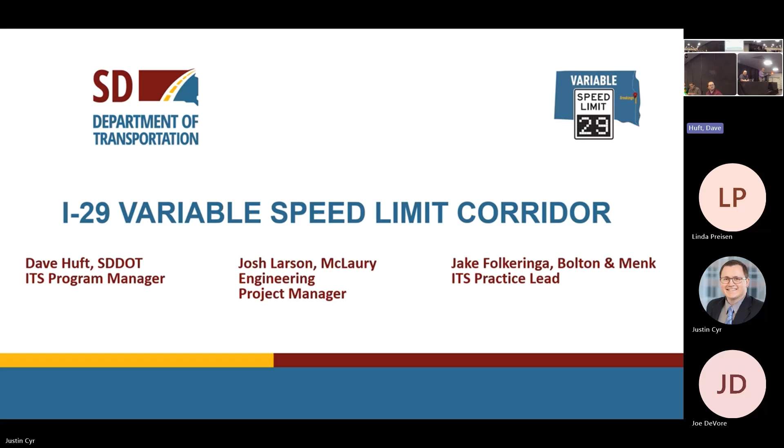Josh Larson with McLaury Engineering, and today we're going to run down the I-29 variable speed limit corridor. This is a project that was recently completed here in South Dakota, and it was in service for the first time this winter. Jake will come up and present, and Dave Huft will join me. But today we're just going to share a little bit, starting with what I joke about as the fun section of the presentation, the project background, and then Jake and Dave will give more details.

So this project, the project limits - this project is about 35 miles straight north of here. If you go over to I-29 and head north, I think mile marker 80 is Sioux Falls. We started at 114, which is the Flandreau exit. As you go north through the corridor, some landmarks: at 117 there's a large slough area adjacent to the interstate. Exit 121 is the Ward exit, where South Dakota DOT has a rest area. At 124 is the Big Sioux River crossing, and 127 is the Medary Creek crossing. Then as you get into Brookings, there are three interchanges at 130, 132, and 133.

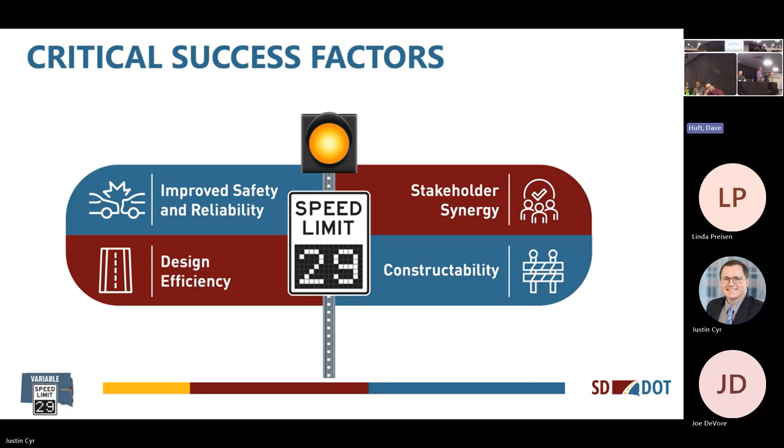When we kicked off this project, we identified four critical success factors. The first is we wanted to improve the safety and reliability for this corridor - we knew those two things were a big success factor. Secondly was stakeholder synergy; we wanted to hear from all the stakeholders on this corridor about what they dealt with, the problems and issues, and how they handled those problems along the corridor. Then we wanted to look at design efficiency, trying to make this a cost-effective approach but also a high-quality product for the user when it was all said and done. And then constructability - we wanted to make sure our plan set was easy to understand, not overly complicated, so we could get a lot of contractors to want to bid this project. So those were the four success factors we were looking at.

We created this dashboard here, so we utilized all the data that we had available to us, put it into the dashboard, and we were able to look a little closer at the data and start to see some trends and some different issues that popped up along the corridor.

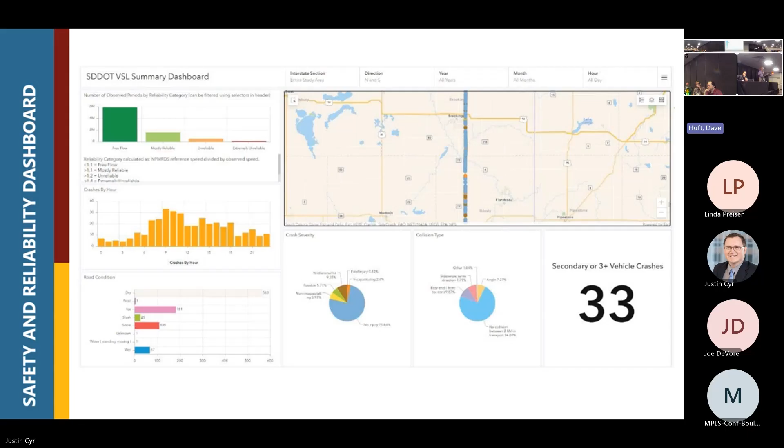As we put this into a heat map, we could see where all these accidents were occurring. Some of these locations on the map really stand out. The first one, on the far left, is 115, the Flandreau interchange.

What we heard about this location is that the weather just seems to change at this spot. To the south it'll be wet and the road conditions seem okay, but right at this location things seem to change all the time—it will get icy as you head north.

117 was another location that stood out—that was the slough area. And 124 was the Big Sioux River crossing.

The next larger heat spot was 126, 127—the Medary Creek crossing. At that location, the interstate sits down lower than the adjacent ground on both sides, so it gets different wind action through there and some drifting, which we saw as a problem area.

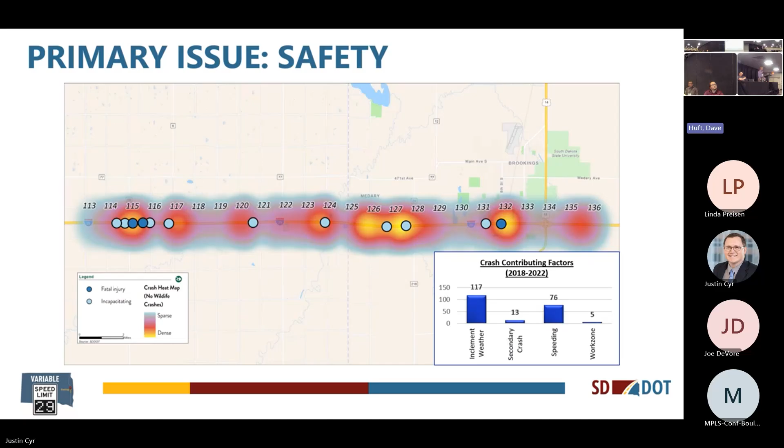Some other background on this corridor: in 2022, the far left graphic shows there were 3 full roadway closures for that section. The next graphic, with 9 football trophies, might make you think that represents how many national championships the Jackrabbits have—good guess, but not correct. That's actually 9 home football games they had in 2022, which created a lot of congestion and traffic along the corridor.

So that's some of the background data that we had, and I'm going to kick it over to Jake here to get a little further into the details.

All right, thank you, Josh.

I want to talk a little bit about the proposed system and what we came up with based on this background data. First off, we did an extensive stakeholder engagement process at the beginning, working with everyone from DOT staff, maintenance staff, ITS staff, and state patrol to really understand what the issues were along the corridor, which Josh just talked about in the previous slides.

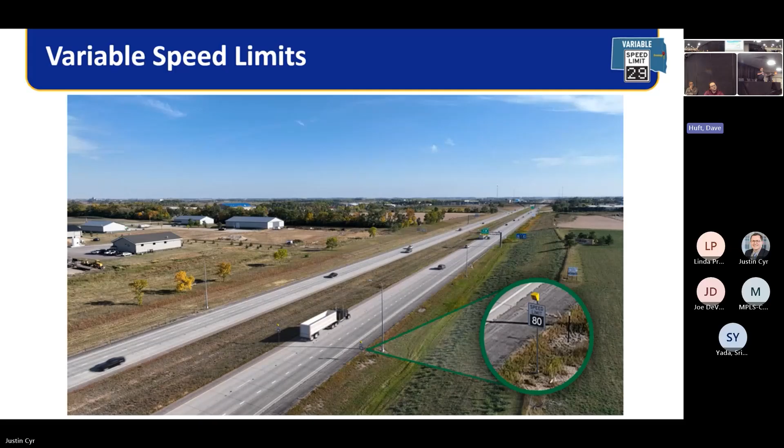We used this at public engagement meetings, things like that, just to give people an idea of what this might seem like. So as you can see here, this is just a typical day on the corridor. You can see it's sunny. This variable speed limit sign says 80 miles an hour. Everything is good.

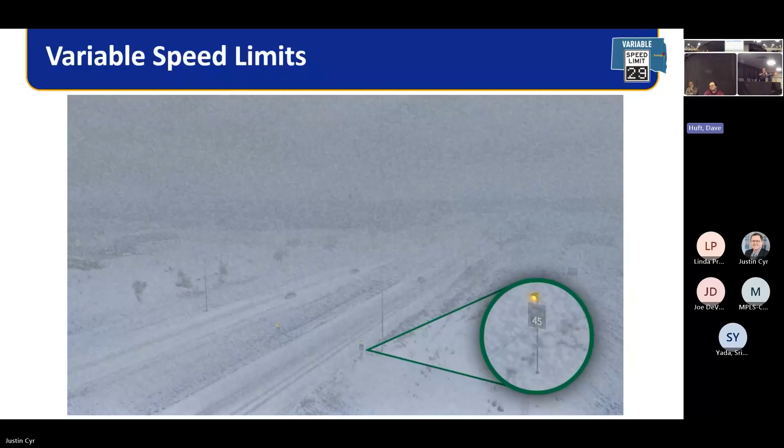Here we go. As the snowstorm starts to roll in, we see the snow detection - the cameras are detecting that snow. ITS staff might be meeting with region staff saying, hey, we need to lower the speed limit. It can get lowered to 60, you can lower it to 45. That's a decision they make, it's not automated based on the weather.

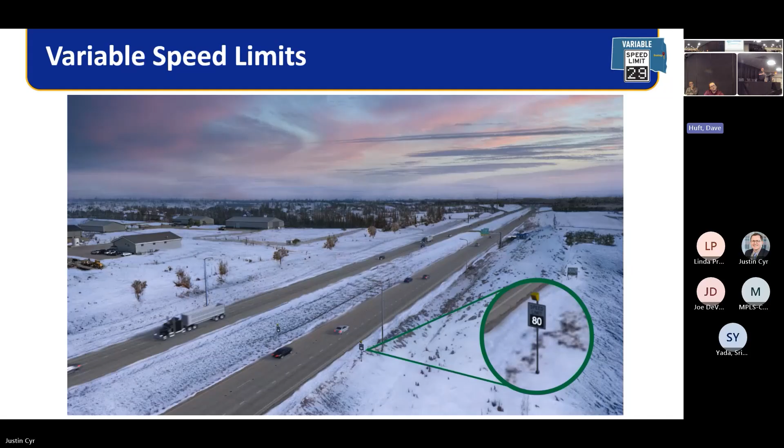Then as the weather improves, maybe the snow plows are out, things start to clear up, we can slowly raise that speed limit back up to 60 and ultimately the 80, back to those free flow conditions. That's just a quick synopsis of how it works, but I'm going to spend a little bit of time talking about the details of the different ITS devices and components that go into a system like this.

On the top are what we call the core VSL system components, the things that were really necessary to make this work. On the bottom are other ITS devices done with the project that are complementary services, I would say, for operations along the corridor.

Obviously, you have the variable speed limit signs - that's an example of one there, what you're using to convey to the motorist the current speed limit. The second picture is an environmental sensor station, so from that we're getting different road weather data - could be pavement friction, visibility, wind speeds, humidity, different factors we want to use to understand the conditions on the roadway.

Vehicle detection, that's all about traffic speeds - how fast are people going, are we seeing a lot of slowdowns due to weather or something else. Cameras providing us the eyes in the sky to see what's going on out there.

But we did consider some supporting ITS systems - dynamic message signs to give more detailed traveler information to the public about what's going on, if it's a weather event or maybe there's a backup for a Jackrabbit football game. Ramp queue detection was also used, mainly during those home football games where the exit ramps to the SDSU area are backing up so much that cars are on the main line. Obviously, if there's cars stopping or slowing down on mainline lanes of I-29, we're going to have problems. So that's something we looked at.

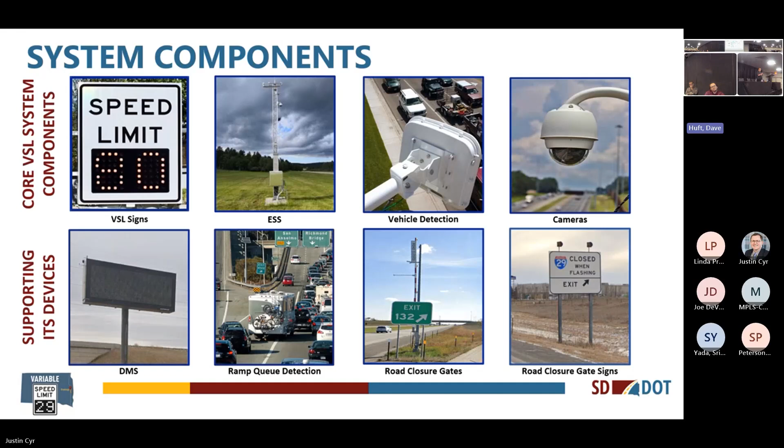Road closure gates, they use those throughout South Dakota to close the freeway as needed during inclement weather events. And also road closure gate signs - those are signs that might be on I-29 or one of the crossroads to make sure people know the roadway is closed ahead. So those are the different components. I'm going to spend a few minutes talking about each one of them, why they're included, how we place them, and that sort of thing.

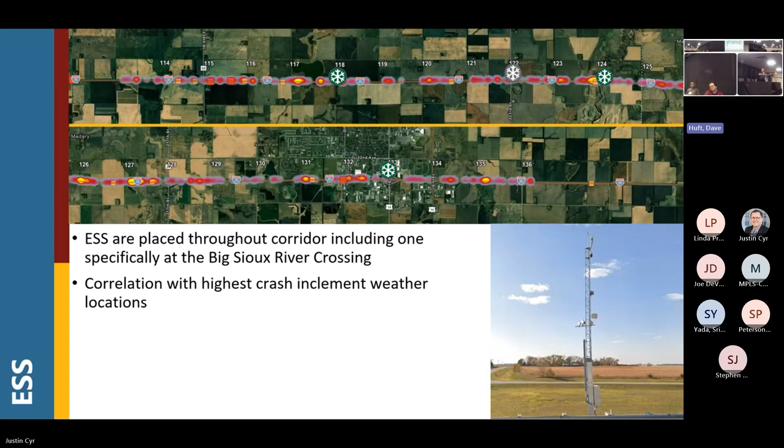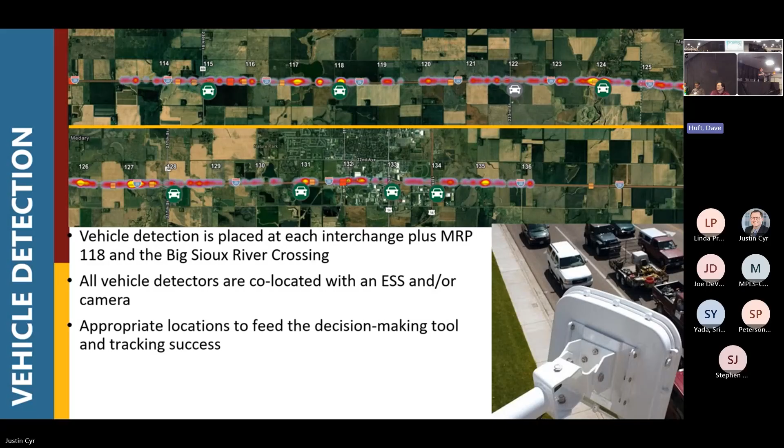Another thing I want to talk about with the vehicle detection is it's not just useful for detecting when vehicles are slowing down, but it was also a useful tool to help us evaluate how well the system worked. So we can look at, okay, what are speeds before the snow event, let's say? How are speeds changing during? And then how are we getting back to normal conditions? So the detection was a key part of that evaluation. I think Dave has some slides on that later on.

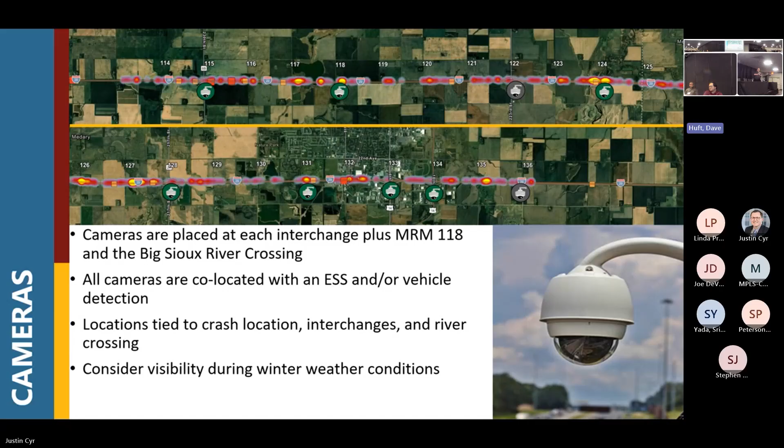Cameras, I think this is pretty obvious. You guys have all seen traffic cameras in different environments. Again, trying to co-locate these where we were already providing power or communications anyway, maybe at a place we see a lot of crashes, interchanges, river crossings. One thing I will note is these cameras can probably see at least half a mile, maybe a mile if the conditions are ideal. We realize when you're using the VSL system, the conditions aren't ideal - you might have whiteout conditions. So by no means is it end-to-end full camera coverage during any condition. But in general, on a nice day, we can see most of the corridor, with some extra ones in the Brookings area.

DMS, this is something that we went back and forth on a little bit as part of the project. There was an existing DMS on the north end. On the south end, we thought about adding one. Different perspectives on this - obviously a nice thing about a DMS is you can provide additional information to motorists as they enter the VSL corridor. A couple other states have told us they find better response to the VSL system if you can provide that supplemental information - it says icy road ahead or there's a crash. It seems like people slow down better if they know why they're slowing down rather than just seeing a sign with a different number on it.

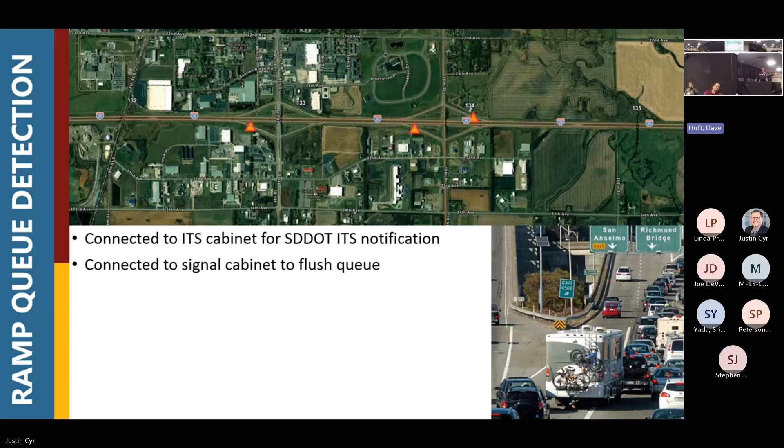We looked at some different options for how we wanted to do these. What we ended up doing - I know State Patrol will a lot of times just have someone go out there and help manage things - we did connect it to the nearest ITS cabinet. So Dave, when he gets his ATMS operational, we get a notification that the queue is built up, and he could use that to post a message on a DMS if he wanted. But it's also connected to the signal cabinet, so if we wanted to activate a particular phase to flush the queue, we could do that as well.

Road closure gates. This was another one that we had some different conversations about. Do we want road closure gates at all the interchanges or ramp closure gates? There's mainly the main line gates that obviously force you to exit. The ramp gates prevent you from getting on. So we worked with the region to figure out where those made sense. At locations where we didn't, the location is not shown here.

We did do some consideration of possibly automating the gates, and by that I mean the ability to remotely have the gate lower and raise. A lot of times with that you want to have a camera or something to make sure it's working properly. But I know there are region staff located close in the area, and that's something that did not end up being included in the project, but something South Dakota might consider for future projects.

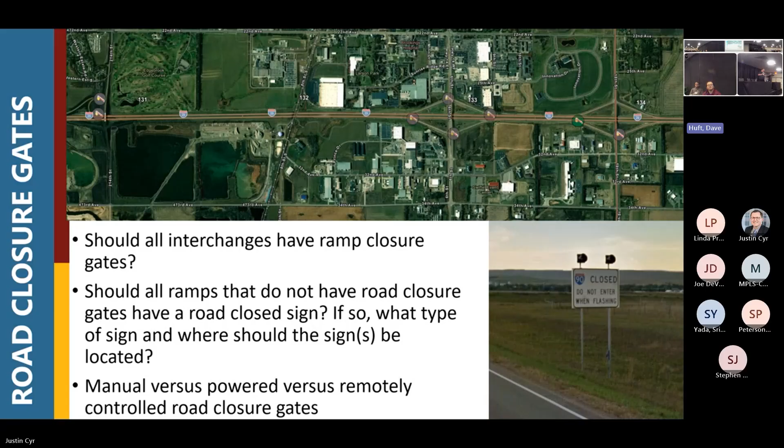We also try to provide power to the adjacent VSL signs from that location. We're trying to minimize the number of power services we have along the corridor. Like I said, it also enables us to provide backup power at one central location. We did decide upon battery backup for all the sites, and all the sites also have a generator hookup. So if we were to see a significant power outage that lasted days, if the region wanted to, they could bring generators out there to power some of the signs.

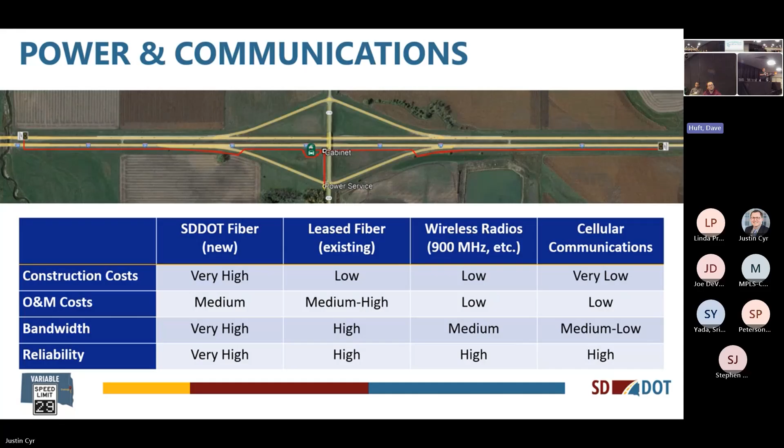From a communications perspective, we looked at different options. Obviously South Dakota DOT having their own fiber would be awesome, that'd be great, that'd be reliable, but it's very expensive. We looked at lease fiber - there's some other fiber in the area - wireless radios. We ended up going with cellular communications. That's what the DOT uses for their ITS communications for a lot of devices across the state, and it's plenty adequate for what we're doing here with posting messages to signs, getting camera images, things like that. And it's operated really quite well.

There was a previous design for an I-90 VSL in Sturgis that was done before this, and unfortunately that one, the bids came in high, and we wanted to make sure we incorporated some of those lessons learned from that previous project into ours. Some of these Josh talked about a little bit earlier - we wanted to make sure these plans were simple and clear, and we needed to get bidders. That one previously bid for Sturgis along I-90, they only received one bid. It was way over the engineer's estimate, and the project wasn't able to move forward. We didn't want that to happen here, so we tried to take some lessons learned and incorporate them.

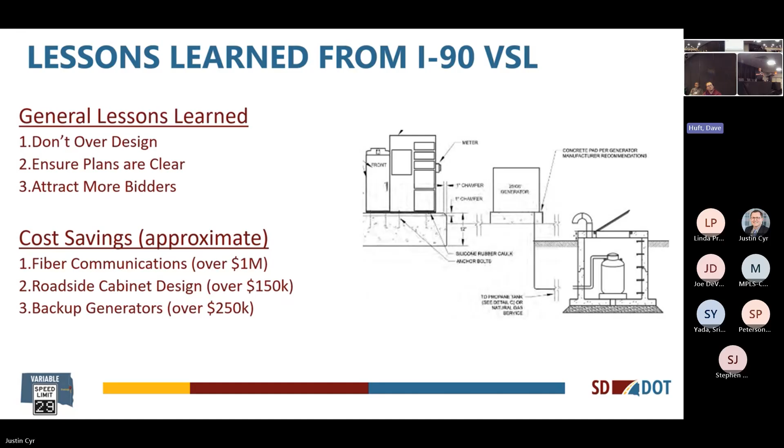Some other specific things we did - I know that corridor originally they wanted to do fiber the entire way. You can save a lot of money by not doing a fiber deployment. We kind of simplified the roadside cabinet design. That other project also had backup generators permanently installed at a lot of sites with underground propane tanks to power them. So we really worked with the stakeholders to talk about what do we really need. We want to make sure this project is successful and has a reasonable cost, and those are some of the decisions we made to optimize that design.

And with that, I'm going to hand it over to Dave to talk more about the construction and how the system operates.

I can't do two things at once. Before I get started, Brian, how much time do we have left? Still got 20, 25 minutes. Oh okay, I won't take nearly that much.

I wanted to take time to acknowledge some other people in the room who were really involved in this. Pat, I'll start with you. Pat Brueggemann works in our ITS office. He's an electrical engineer, and he did a lot of the work being on site with Ingolstadt Electric to make sure that stuff got installed right and worked when installed. A huge amount of the success there. Where's Christina? She disappeared? She left. Now she's not going to get acknowledged.

Mark and Travis, would you please? Mark Peterson is our Aberdeen Region Engineer. This project is two-thirds in Aberdeen, one-third in Mitchell Region. So the question was, who's going to run this? I think Mark drew the short straw. He was the one actually deciding when to impose or activate the lower speed limits, and without the ATMS, he was doing a lot of that just by sheer dedication and time.

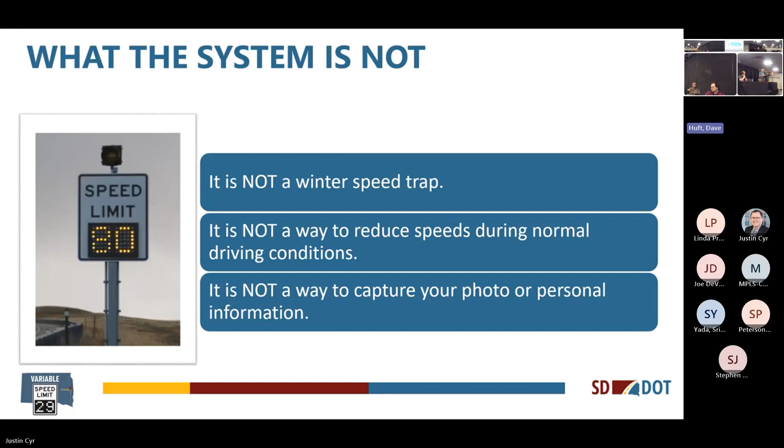It's not a way to use the cameras or anything to record or identify people. That's not part of it either. So some of the messaging we've done for our public information is to try to communicate the purpose of the VSL and what the purpose is not.

This was a manually controlled process. We do not have an ATMS to automate it. More than that, we didn't really know the rules of the game, when if you were going to put rules into an ATMS on how to automate it, what would they be? We don't have enough experience to know what that should be. We actually have legislative requirements that require manual action and review. So this is not an automated system, but we get information from the cameras, from the speed sensors, from visibility and the road sensors for road condition.

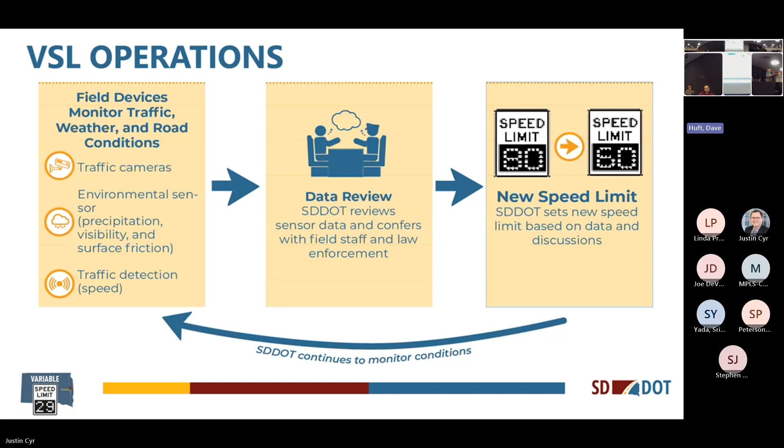Mark evaluates that, he talks to other people. This is a partnership also with the South Dakota Highway Patrol and local law enforcement, getting information about their perceptions. Then there's a decision that the speed limit is appropriate to lower. There is an approval process for that, and as time goes on, the speed limit drops, and all that information is continuously reevaluated. Mark also uses forecasted weather information, so we have our maintenance decision support system forecasting what the road conditions are going to become. That's another element that goes into the consideration here.

So these are the rules that we established. These were not established by AI. They were established by dartboard and judgment.

So it takes into consideration the visibility, the average traffic speed, what the road surface conditions are, and you'll see that we can set speed limits in 10-mile-an-hour increments. We had thought about 5-mile-an-hour increments to start with, but it seemed like our knowledge was not that refined yet to say what it should be, 65 or 60.

Now that could change in the future, but for starters we just did 10-mile-an-hour increments down to 40. The idea was if it got lower than 40, the road should probably be closed, so we weren't planning to set VSL lower than 40.

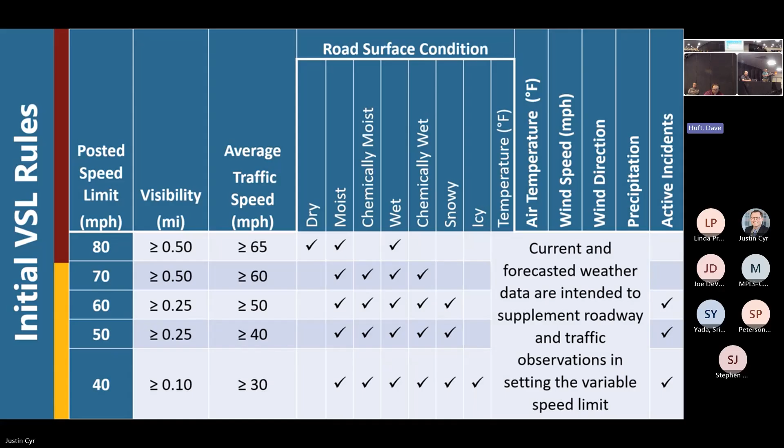We won't go through the chart here, just to show you the factors that are considered and how, as conditions get worse, the appropriate speed limit drops, and as the conditions restore, you bump up to the higher speed limits again.

These colors are a little washed out, but this depicts the dates. There were 13 instances of the variable speed limit being activated this past winter. You'll see the dates on the left, with a 2-day period on each line, and it shows the time the variable speed limit was started and when it ended.

If the color were better, you could discern what speed they were. So the lowest one, on January 18th, actually went to 40 miles an hour. It was kind of a short-lived one, but it was down to 40. Some of the other ones went to 60, 50, 70, and it's pretty hard to discern the colors the way it displays on the screen.

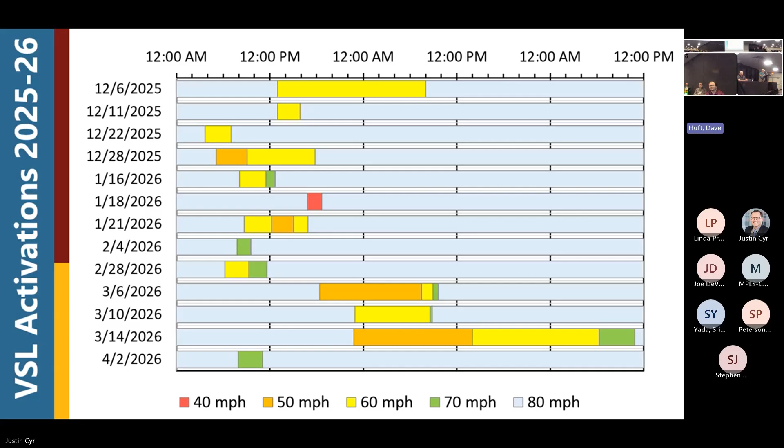But you can see some variations there, like on March 6th, it went down to 50, then to 60, then to 70, and then back to 80. This is kind of how it worked. Some of them were pretty short-lived, maybe there were temporary visibility problems, and one was quite long, spanning into 2 different days.

Some of the operational issues are ones that Mark has identified. We've got a meeting scheduled next week with various DOT people and staff of the highway patrol, and possibly local law enforcement, to go over what we did, how well it worked, and what we should be doing differently.

One of the operational issues we encountered is statutory ambiguity regarding the approvals needed. The way our enabling legislation was written, it said variable speed limits need the joint approval of the Secretary of Transportation and the Secretary of Public Safety, two cabinet level people. Our attorneys actually interpreted that to mean that every time you change the speed limit, you had to get concurrence of the two secretaries.

That's totally impractical, that would never happen in time, and by the time it did happen, it would be too late. So we're taking a different interpretation, somewhat choosing to ignore the advice of our attorneys, saying instead that the secretaries declare that this section of road is a variable speed limit section, and then we have rules and procedures we use to set and lower the speed limits.

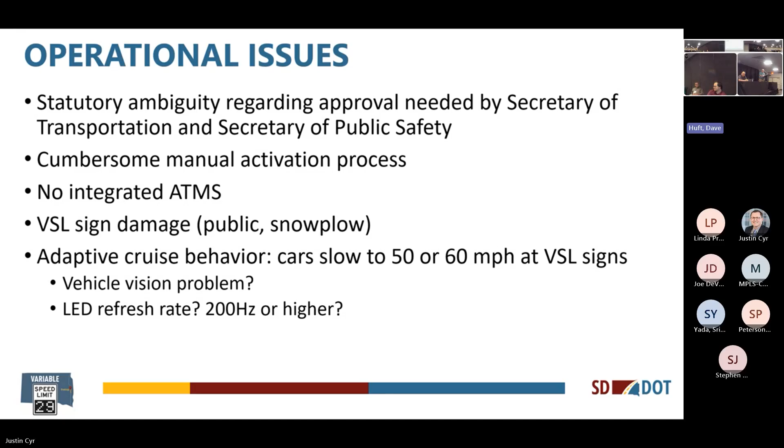So, public attitudes about this: there are both supportive and questioning attitudes. In general, I think people recognize there's some safety benefit to this, especially on that corridor, which has had a reputation for winter crashes. I think there's a sense that, okay, this does make sense, and also some support for protecting first responders.

We've had highway patrol cars hit on that corridor. We've had snowplows hit on that corridor. And so this is about improving the safety of the people who have to be out on the roadway.

Law enforcement strongly endorses this, both the state highway patrol and the county sheriffs, and there's strong endorsement by people who understand what winter operations are about. The more you know about winter operations, the more likely you are to support this concept. There's also a recognition that somebody from Mississippi driving on I-29 might not be able to handle the conditions, and not everybody's familiar with that corridor or with driving in winter. So this makes sense for that reason.

There still are people who think it's a speed trap. Even a couple of our legislators said, do you mean to say we have to tell people what speed to drive? And that's a curious statement, since we have speed limit signs in a lot of places.

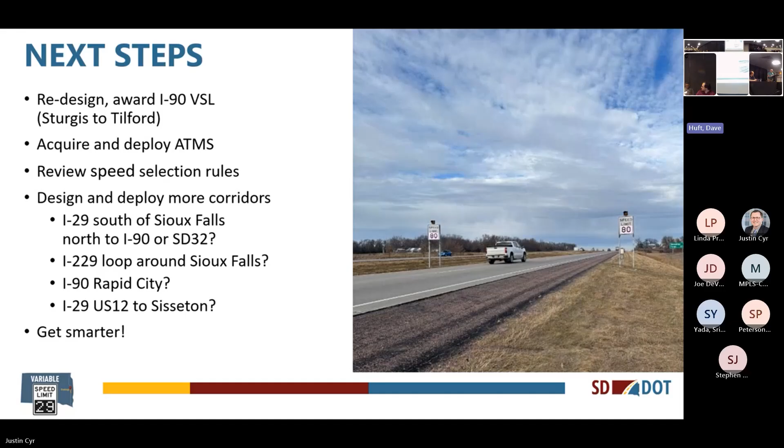And my last line here is dead serious: we need to get smarter about what we're doing, because this really is a learning experience, a learning experiment, and presumably next year will be smarter than this year. One of my sayings is, if I live to be 400, I'm going to be really smart—that's kind of the pace I'm on. So anyway, we'll learn together and get better at this.

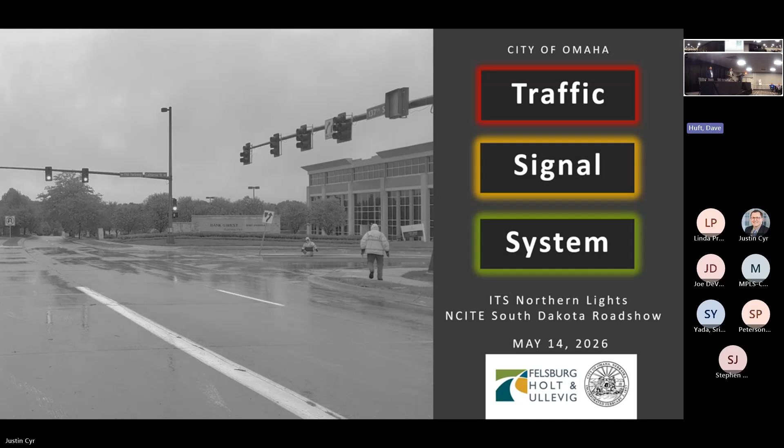So a little outline for the presentation today. My name is Adam Denny, I'm with Felsburg Holt & Ullevig. I have Brian Guy with me, he's with the City of Omaha, the Assistant City Traffic Engineer for the city. We're going to go through some background. Brian's going to talk about the master plan, I'll talk about some of the design and operational elements, and then Brian will finish it up with some challenges and the status and what's next for the City of Omaha. So I'll pass it to Brian.

Thanks, Adam. Again, like Adam said, I appreciate you guys inviting us up here. I think I've exhausted everybody in the Omaha area talking about this, so it's nice to have some fresh blood. I think Adam's got about 700 slides — he's gonna barricade the doors, we're gonna order pizza, and you guys are in it for the long haul here. So no, we're gonna try to be high level, keep it a little fast paced, but just want to share our experience and what we've been doing for the last 10 or 15 years.

So to start out, talking about where we were, going back to the 2011-2012 timeframe. The City of Omaha, for those not familiar, is a medium-sized city. As cities go, we have over 1,000 signals within our jurisdiction that we own and operate, at least back in 2012. At that time we had zero PTZ cameras, no ability to really monitor anything visually. The entire system was run on 170 controllers with Wapiti software — not the most user-friendly software as modern systems go. The interface was through a DOS-based software program that didn't even require a mouse to use. Dot matrix printers were still the norm when I first started at the city, and we talked to all of our signals, the vast majority anyway, via dial-up communications.

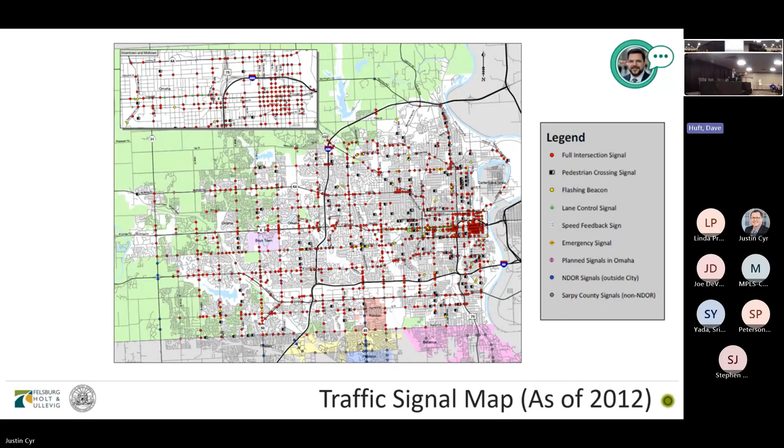So it adds up pretty quickly. The bottom portion of the image there, you can kind of see a border. That's Harrison Street, which is also the county line, where some of the suburban communities do their own thing.

So like many jurisdictions out there, when I first got involved with this whole thing as a consultant, I worked for Iteris in the 2011 timeframe when the city started this master plan. I helped develop the master plan as a consultant, and then in 2014, I actually joined the city to help them implement it.

When I arrived, the city was doing as much as it possibly could with the technology that it had. You may be surprised to know that we use Synchro to do a lot of signal timing like that, but the 170s require force offs.

So all of our timing for 1,000 intersections was converted to force off, handwritten in 1,000 different folders and filing cabinets. Here's an example of one that I'm sure you can't read, because it was written originally, it's been scratched out, it's been updated, we made temporary adjustments, we went back to the original. You can see over time, it's not a real efficient way to manage timing.

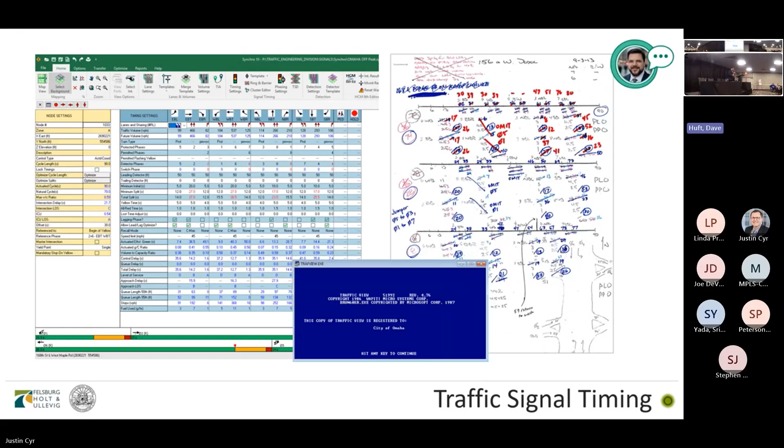So pretty quickly it was evident to me that we needed to do things a little bit differently. That blue box there is kind of the software interface to what we call Traffic View. I don't think you can probably see it on the screen, but it says copyright 1986, and we were still using it - actually we're still using it today. Slightly different version than what you see there, but at its core, it's doing the same thing.

So again, dial-up communications, a master local system. We had 60 phone drops spread throughout the city at the time, which operated anywhere from 1 to 30 local controllers. You could only talk to one controller at a time, so it was difficult to monitor 1,000 signals when you can only do one at a time.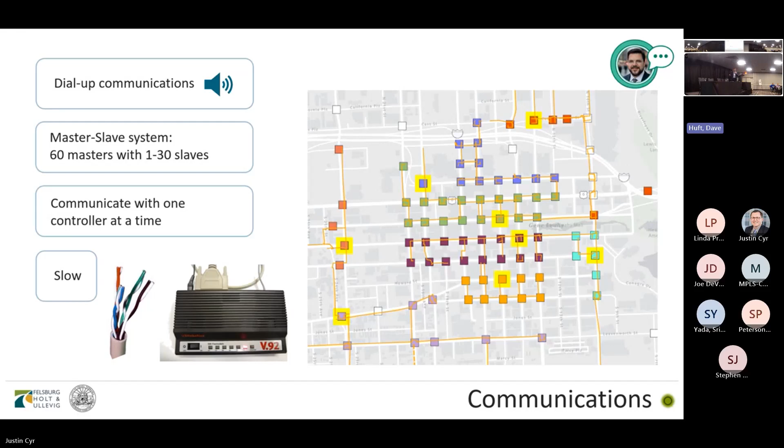That's just a snapshot of the downtown area and the comm system. 170 controllers - I'm not going to get into this, but there's some beauty in their simplicity. But there's just a lot of things that you can't do with a 170 controller that the industry expects in 2026.

And then our cabinets, we had a mix of cabinets. We're a Caltrans agency, but a lot of our cabinets were pretty old, very small. You're not going to get a lot of extra equipment - the core signal equipment, that's it. But to fit communications equipment, modern detection systems, camera systems, it was going to be difficult to do that.

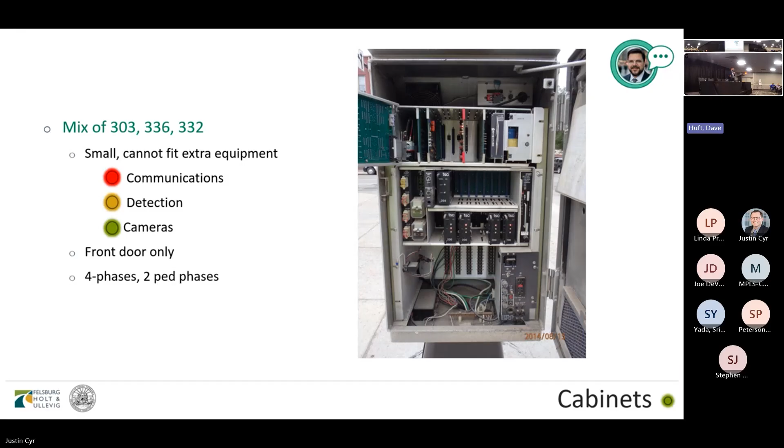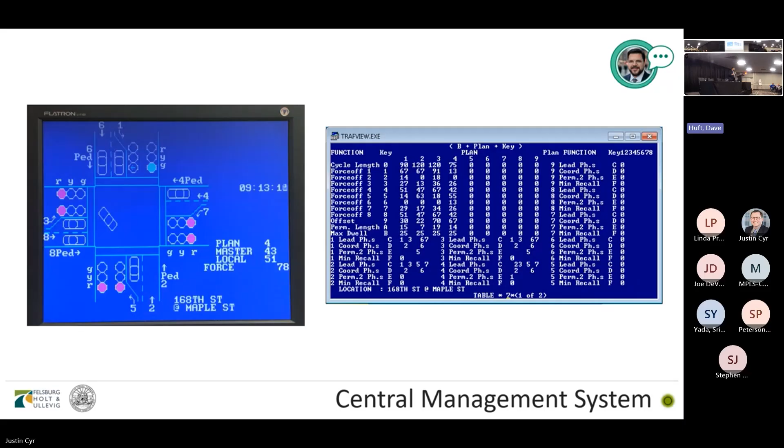So again, just another snapshot of our central management system, I guess, if you want to call it that. Pretty basic, but it did the trick for a lot of years. But time to retire that.

So again, we went down this path of developing a master plan. It kind of started from two things, I think. Prior to me joining the city, the local media wanted to do an interview with the traffic department, and one of their questions was, where is your traffic operations center? The traffic engineer at the time was like, there's a dusty computer in the corner - that was it. There was no traffic operations center.

There was also some desire to do adaptive signals, of all things, on a few corridors to potentially mitigate some issues, and we were far from doing any sort of adaptive system at that point in time. So at the time, the people involved said, let's take a high-level look at what we even need to do and what are the most important things to accomplish. That led to a pretty comprehensive master plan. I'm not going to read through all these things, but as you can imagine, it recommended that we do a lot of things that you guys are probably already doing.

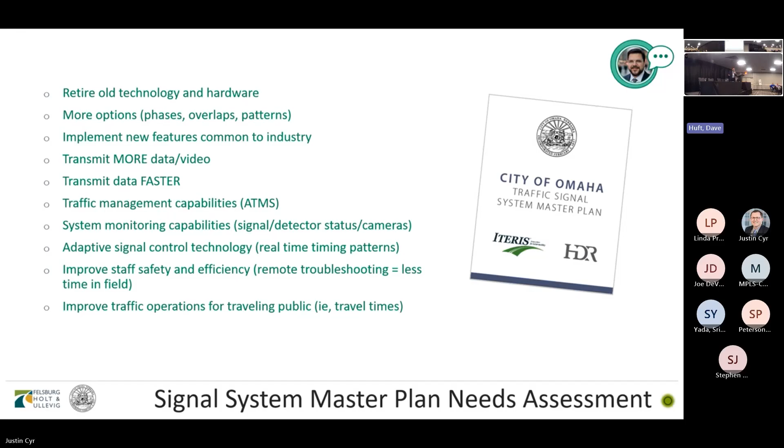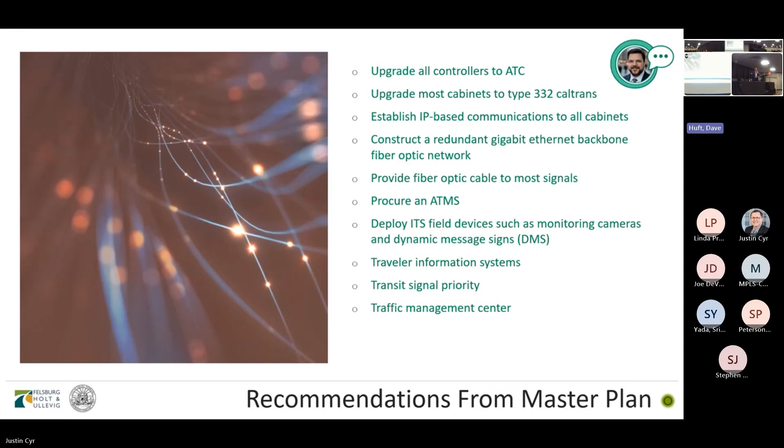Basically at its core, we're replacing all the cabinets throughout the city. We're upgrading our controllers, going to run IP-based communications, preferably fiber to every cabinet in the city, procure an ATMS, deploy cameras for monitoring, TSP, and at the bottom, a traffic management center for our staff.

But since then, we have actually added a couple of engineers, a handful of signal technicians, some networking people. So we have made some progress over the years at trying to get more staff resources in place.

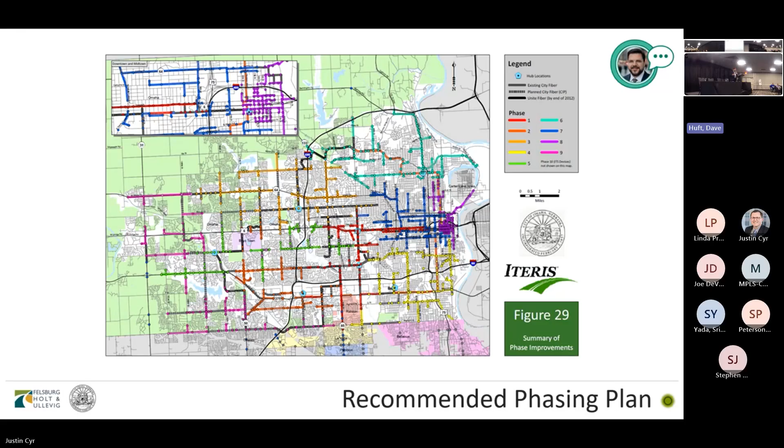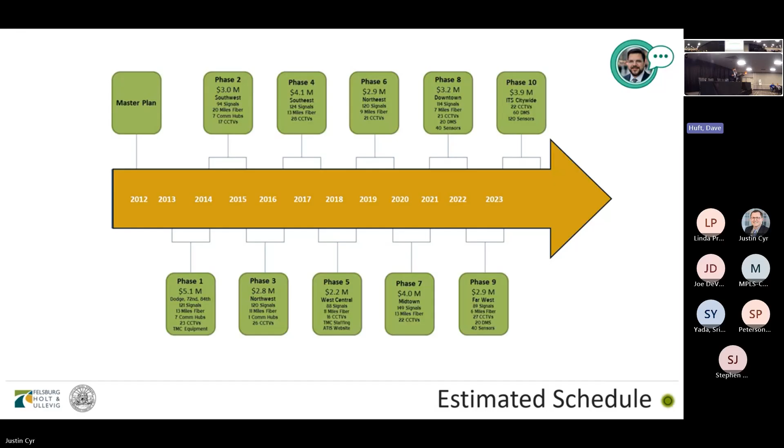Then our recommendations for a phasing plan coming out of the master plan. The colors are hard to see, but we divvied the city up into 10 different pieces at that time, and we're going to upgrade one after the other until we got done. The rough timeline at the time, again this was 2012 - I guess we had pretty aggressive expectations that we were going to start immediately the next year and be done by 2023. I can tell you it's 2026 and we're still not done. But despite that, we're moving along. The end is in sight, and we'll talk a little bit more about progress later on.

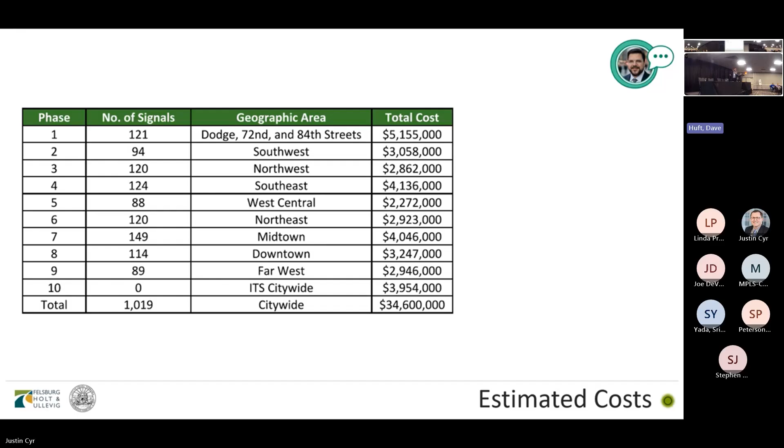So estimated costs - again, back in 2012, to implement these 10 phases, we came up with a price tag of just under $35 million, which at the time was kind of an eye-popping number. We budgeted in our local CIP $1 million a year, and most of that was for just general replacement of outdated signals, more from a structural standpoint - mast arms that were about to fall down just needed to be rebuilt. So it seemed like a really daunting task. Where are we going to find this amount of money in this amount of time to get this all done?

We'll come back and talk about what we actually ended up spending and how we obtained that funding. But I'm going to turn it back over to Adam here, and he's going to talk a little bit more about some of the technical details.

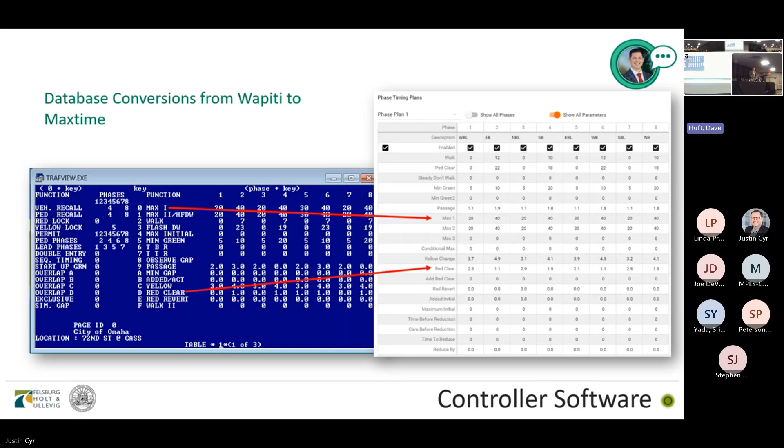One of the other systems master plan updates was the conversion of that old database, that Wapiti information, converted into MaxTime, which the new controllers would run. So we helped the city come up with some innovation to convert those using some software, as well as some AI - not really AI yet, but utilizing some innovation with Excel and programming to get the conversion of the old databases to the new format.

Another thing we had to do was update all the clearances for every signal that we were working on throughout the city. Brian and his staff kind of set up some standards for signal timings throughout the city. So doing all the new measurements for PED clearances, yellow clears, red, all red, and coming up with new clearance timings for every signalized intersection that we were upgrading was also part of the project.

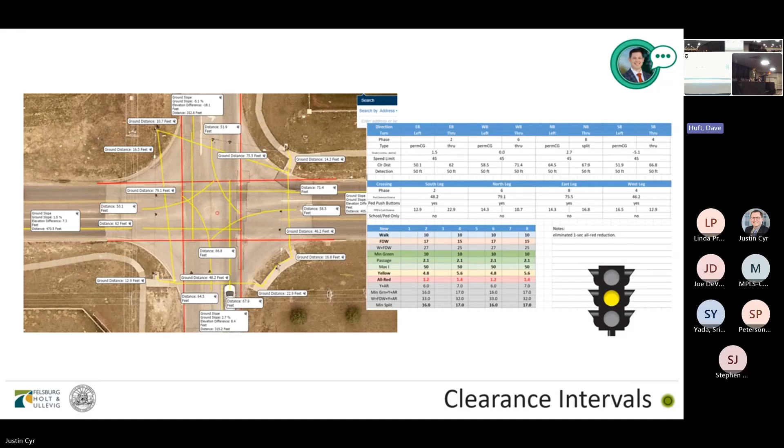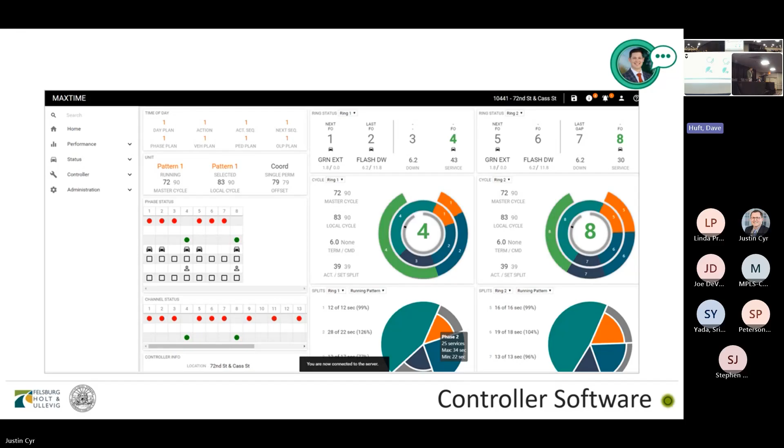This is MaxTime, so this is the controller software that Brian gets to use every day once he gets the signal system upgraded to talk and implement new timings and mess around with signal systems. So that was part of the project that Brian gets to use on the back end to help him and his staff be more efficient in how they maintain their signal system.

So basically every project we're coming through, we're putting either a new pad mounted cabinet - pulling the old one out, putting a new one on the pad - or replacing all the pole mount cabinets with a 336L. Again, cost saving measures by keeping them on the pole as they go into a whole new pad. If we did a whole new pad, we'd have to rewire the whole intersection.

So again, some cost savings built into this as well, but really the standard plan updates really helped the design teams. There were 3 or 4 of us working together, usually 1 or 2 of us at the same time on a different phase of the project. So having that all standardized up front was really beneficial to us, to all be on the same page producing the same plans.

One of the unique things about this endeavor was the city has city-owned fiber. They had an old copper-based system that Brian talked about a little bit that did have some fiber, or did have some conduit in the ground, but they did have the conduit available to use if it was in good condition to pull out and put new fiber in.

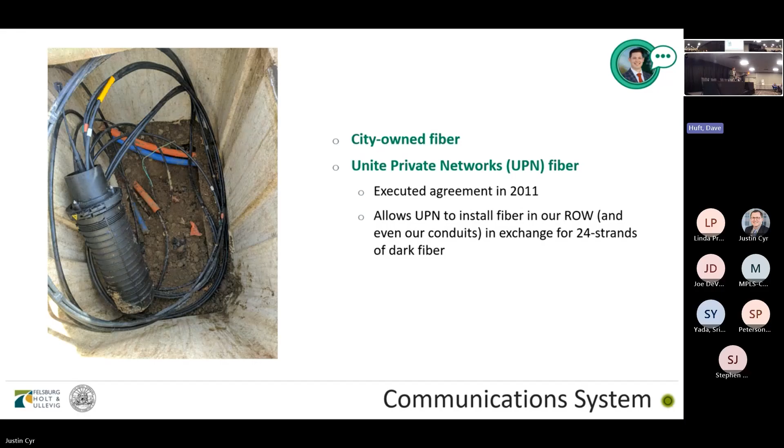But one of the decisions they made early on was an agreement with UPN, Unite Private Networks. In 2011, basically the agreement stated that they would allow UPN to put in conduit and fiber in city right of way. In return, UPN would give them 24 strands of dark fiber to utilize as the city saw fit. So the city took that opportunity to utilize some of those strands for the signal system upgrade.

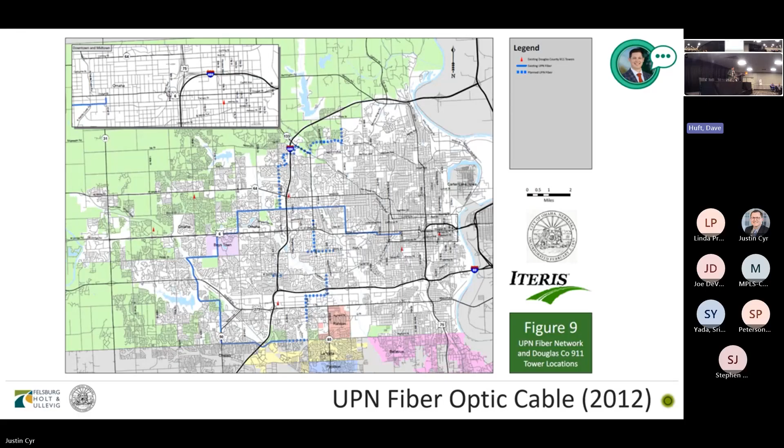You can see here, this is the UPN fiber back in 2012, which basically had a run along Dodge, the main east-west corridor through the city. It's blue in there, you can't see much. And then they had some plans to go north and south. So that was 2012 - you look at their fiber network now, it basically covers the whole city of Omaha, or a majority of it, on their trail system.

So today, I'm guessing we're probably about 60% of the signals get put onto UPN fiber. The other remaining signals have a combination of city-owned fiber or new fiber, or we're pulling new fiber into existing city conduits to make those connections.

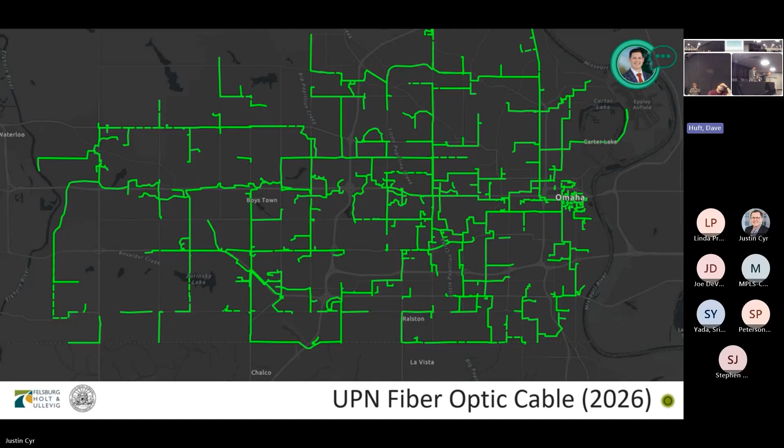There are a few wireless pieces of communication where we run into some issues with the bridge structure or something where it kind of prohibits us from getting access to the cabinet, but very few instances of that.

Historically, the city had a mix of detection technologies. There was loops, which were very standard back in the day. We also had some video, some Sensys pucks in the ground, some radar, some thermal. So just all over the board.

One of the things we heard a lot from the signal techs was they just wanted to standardize the process. They wanted to be able to worry about one controller type, one detection type, one CCTV type. Made their jobs a heck of a lot easier, is what we heard from the signal techs. So that's one thing we tried to do was standardize what we were doing as far as detection.

Through the initial signal system planning process, they came up with Wavetronix as the preferred detection type that they would put in at every intersection that needed detection. So that's kind of where we started with these single approach matrix detectors from Wavetronix. As we've evolved in the signal system master plan, we'd also brought in some other Wavetronix products like the XP21, that single canister looking detection thing.

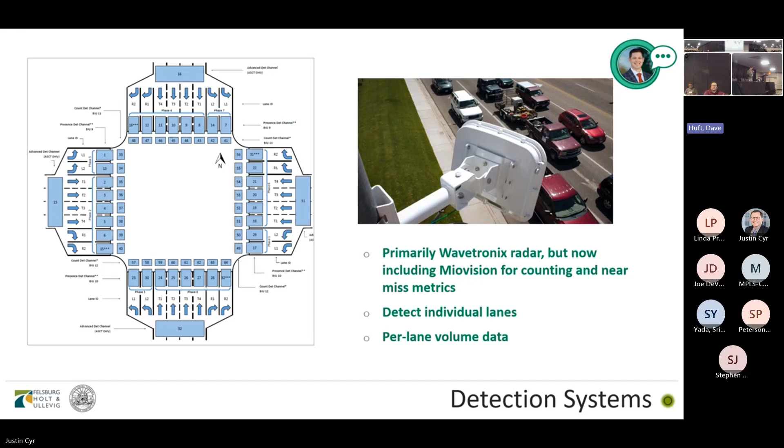More recently, we brought in some Miovisions. The Miovision is primarily used at locations that have safety concerns. The city of Omaha has a Vision Zero action plan, so if an intersection lies on one of the high injury intersection lists, we will put a Miovision in to use some of the safety analytics and the data that it also gives us additional features with.

A big thing, this is probably the most widely seen thing by the public, was the introduction of the flashing yellow arrow. Nothing new, but it was actually very new to the city of Omaha 10 years ago. I believe Omaha was one of the first cities to implement this in the area. So every signal we're coming in and touching, we are taking down the old 5-section heads or 3-section red, yellow, greens and replacing them with 4-section or 3-section FYA heads.

Again, additional safety benefits that we're getting from these. We've seen some really reduction in crashes at key locations with the left turns. It has lead-lag operations, which provides some really good benefits for progression.

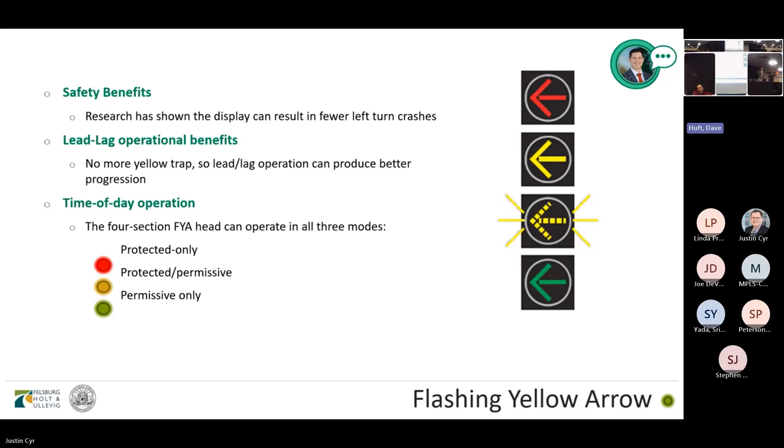On the back end of these projects, once it gets updated, the city will come through and do a corridor optimization project as well. So that's kind of the last phase, I'd say, of the signal upgrading, the optimization phase. And again, some really great operational benefits of those FYAs that we also saw.

One of the additional benefits is the city also implemented LPI at the majority of their signals now. So they have lead pedestrian interval, which is basically you give the pedestrian a walk phase so they're out in front of traffic just a little bit so the vehicles can see them, as opposed to the walk phase occurring when the other green phase is going. So some safety benefits there.

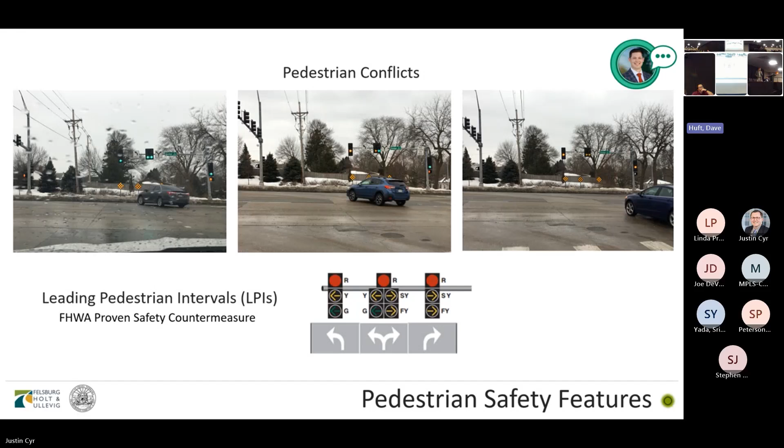We also use the FYA to kind of highlight pedestrian conflicts. This is mostly at T intersections. So if we had a T intersection, that would typically be like a protected left, so it would have a green arrow only. We made it a 4-section head, so if that PED phase was activated on a leg, it would flash yellow and let the vehicle know that there's a conflict ahead. So again, some additional safety features for the pedestrians was implemented.

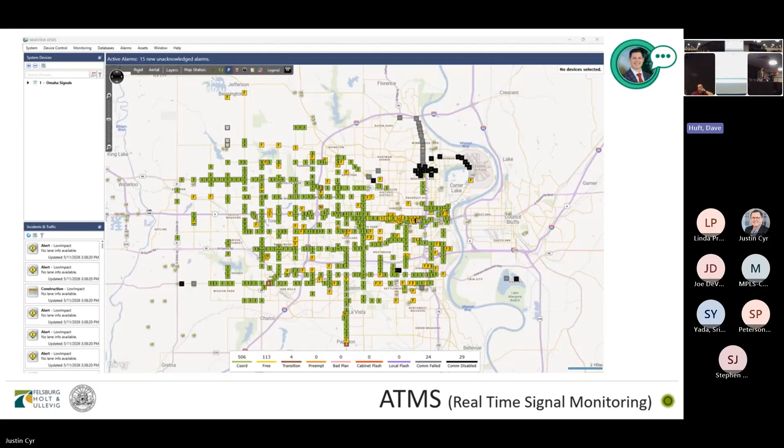Again, the city implemented ATMS software here. This is MaxView, so that's what Brian uses every day to monitor a signal system. That was part of that signal system master planning earlier on that got updated, and now we're bringing signals online every year to the system.

CCTVs - the master plan called out a whole host of locations for CCTVs. These are your primary, your arterial intersections or above within the city. So the master plan kind of set the framework for where we wanted to put this CCTV system. We ended up using the Avigilon cameras and their system here to monitor the camera system throughout the city. So Brian has access to these on his computer if he ever wants to look at the camera.

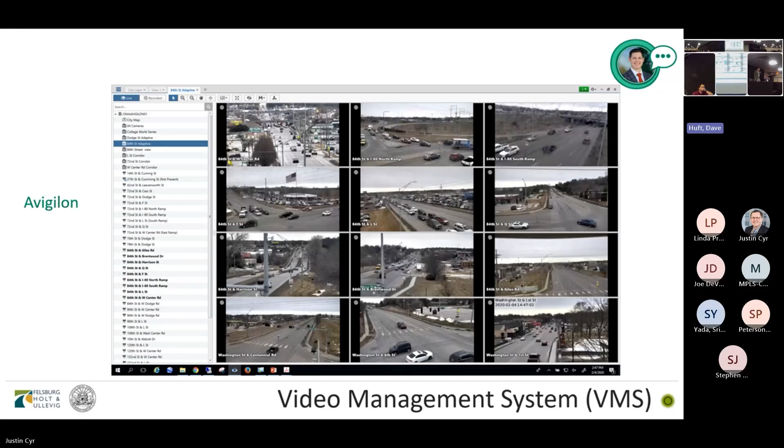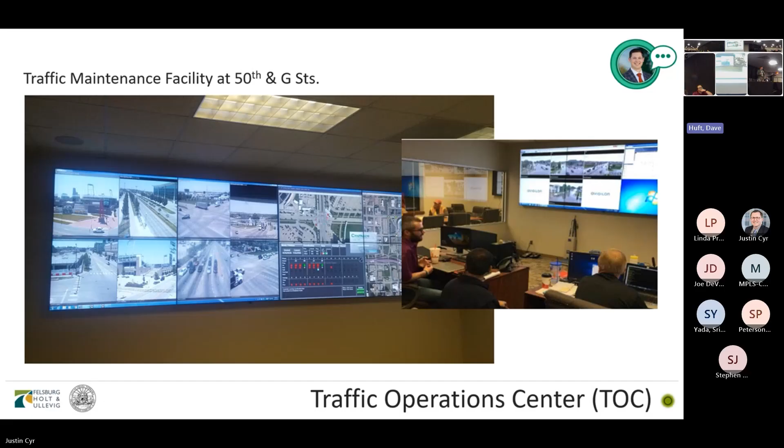Then the maintenance facility was something Brian mentioned, and this was something they did early on. One of the initial recommendations out of the master plan was to implement a TOC. So at their signal shop or the signal tech workshop, they have a smaller TOC with some video boards. I don't think it's fully staffed 24 hours a day, but it's staffed during some special events and whatnot. They're also looking at what to do next with this TMC now that they've got a lot of the signals upgraded.

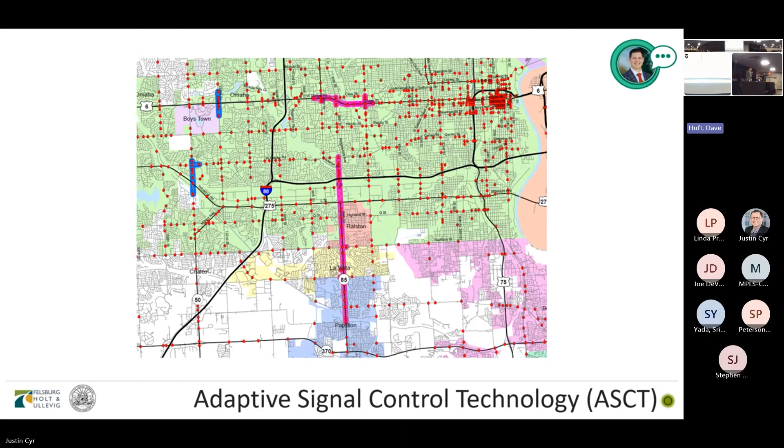Brian mentioned the adaptive control. There were 4 corridors that were picked in the master plan. They've all been implemented as adaptive corridors, and I think they've all been turned off as adaptive corridors. So that's another discussion - if you want to talk about adaptive, Brian's got some insights for you on that.

Some of the other benefits we were seeing with the new signal system master plan - we were able to implement TSP allocations. Omaha, since the initial master plan, has installed a BRT, so we have ORBT, which runs down the main Dodge Street. If you're following Omaha news over the last couple of years, they're putting in a streetcar, which is a huge topic as well. So we're able to implement TSP with these transit uses here with our signal system by having it kind of future ready.

And then also event management is also a key component of this. Omaha's got the College World Series. We have right next to it our big convention center, the zoo, some other arenas there. So being able to utilize a system that can be adaptable for event management is also something that the city wanted to do early on, and something that their system is set up to accommodate as we keep going further into the design.

One of the things is, the city of Omaha and Council Bluffs has a traffic incident management plan. So what the city also has to do is want to have the capability, if there's an incident on I-80, which is the primary corridor through town, it gets a lot of traffic shifted onto those parallel routes, to be able to access those signals, implement new timings, which Brian and his staff will do. If there's ever an incident, they go in and have some pre-programmed patterns they can run on the arterial network to help alleviate some of the congestion seen on the local network when there's an incident on I-80.

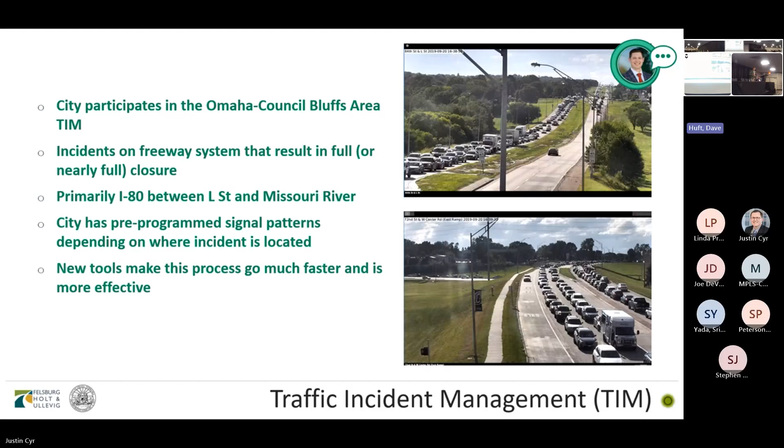So, pull it all together - how did we take all these systems and recommendations and pull them into a plan set? What the design team has been doing is going through several phases. I think Brian mentioned 10 phases initially, now they're broken into letters, so we have basically 20, 22 phases or something like that. I'd say we're about 3/4 of the way through the design of the signal system. There's probably 200-300 signals left that are still not online out of the 1,000.

What we had to do - FHU has been responsible for about 8 phases so far. The kind of unique thing is the funding sources that Brian has been able to get has made this process go through the federal process. So every signal system plan has to go through NEPA, which is kind of unique since we're not really doing much as far as ground infrastructure or ground penetration - we're basically pulling off the cabinet, putting a new one down, or pulling off a signal head and putting a new one in. So it was kind of a challenge, and Brian will talk more about this later, but going through that whole federal NEPA process kind of slowed the process down a little bit. It made something we probably could have done very easily and efficiently in less than a year take kind of a 2-year process to get through, from actual design to construction and bidding.

So the teams all worked together to do the conceptual design phase, which also our firms worked into the NEPA process - identifying some of the wetlands, or if there's wetlands or forests. I think the biggest thing was probably old gas stations in the area. So you basically had to avoid - throughout the design process, if there was a gas station on a corner, you'd try to avoid any impacts to that corner and shift a conduit to the north side. That was probably the biggest change we had to make throughout the design process related to NEPA.

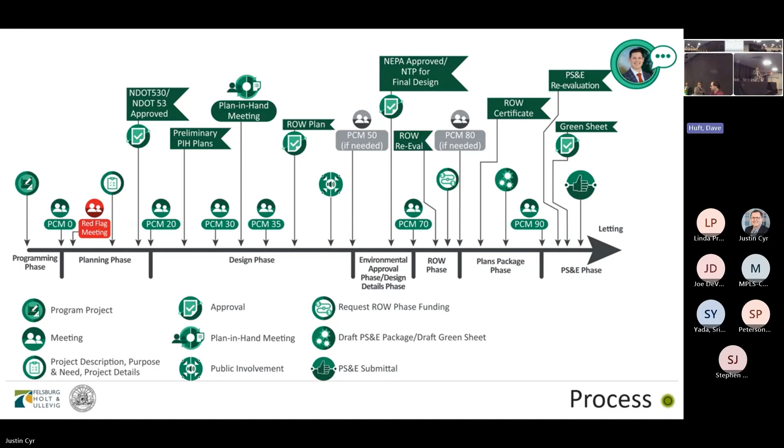Once we got NEPA approved, we then go into the final design phase and then go to bid letting. So a very long process that we had to go through for each of these signal system phases, but that was what was required to get anywhere from, I think, about $4 million a year in federal funding to help implement basically 2 phases each year, which is kind of the path we've been on.

So how we set up the plans was basically we did a big data gathering effort for each signal system phase. The phases range anywhere from 20 to 60 signals, maybe a little bit more at a time. It all started with kind of a field review utilizing the signal technicians.

They, I think, are the unsung heroes of the signal system, are the signal techs. So actually one of my favorite parts of the project is going out into the field with the signal techs and pulling conduits, opening pull boxes, seeing what's in there, learning about the system, learning all the issues they had.

So if we encountered a conduit that didn't pull, we would replace that with the project. So we were also doing ongoing maintenance updates with the project. They would know, like right when you got to the signal, they'd be like, oh, this corner is broke, this detector doesn't work, we need this and that at the intersection. So it was really, really cool to understand their viewpoint.

As an engineer, we probably just kind of sit there and design the plans on a CAD file and don't really understand what all goes into an actual signal and the maintenance of the signal that the signal techs deal with every day. So again, we also wanted to modernize the system, but we also wanted to bring everything up to current standards as well.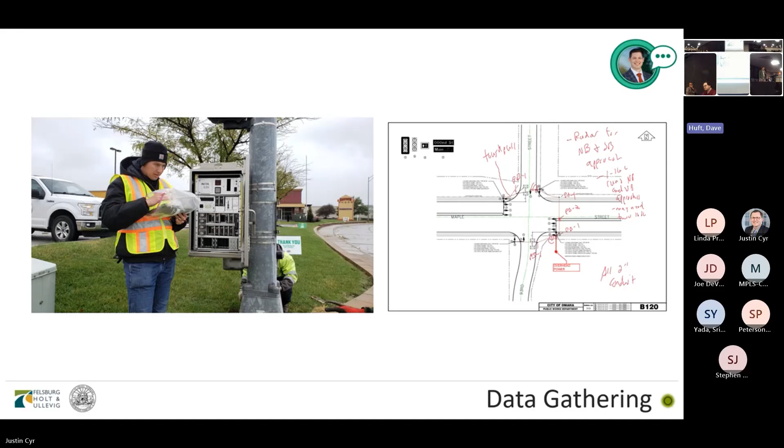So there was a lot of new conduits put in at intersections to replace broken conduits. There was a lot of rewiring at intersections that had splices all over the place that the city signal techs wanted redone. So a lot of maintenance upkeep that we also helped with at each signal.

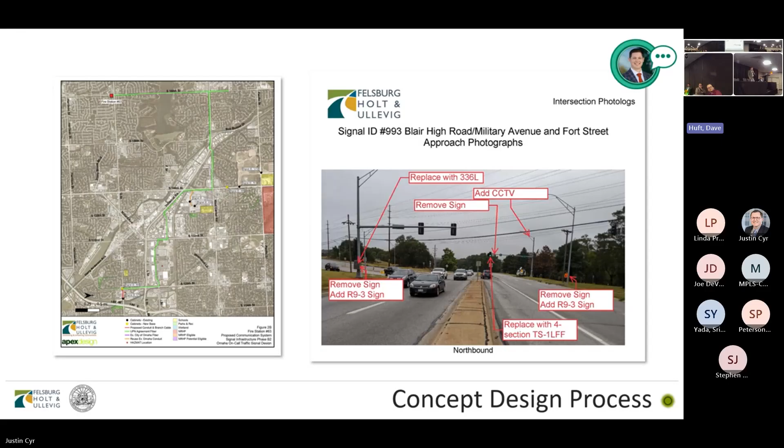This was all kind of put together initially with a concept memo. So before we got into any design, we pulled this all together in a memo that basically outlined where we were going to propose to put new fiber, where we were going to change heads, which heads we're changing, where the fiber connection was going to be. All this was documented earlier on in the process and approved upon with the city staff and the consultant firm. And then this kind of set the blueprint for going into the design phase.

Once we got to the design phase, it was kind of your basic signal design plans. So plans, specifications, and cost. The specs, again, one thing that was done early on was a full set of specifications that every firm was able to use as we went through the design phase. So that really helped streamline the process, having a consistent set of specs.

Same with the plans production. Every plan set for each phase was fairly consistent as far as the layout, the nomenclatures, bid items. So consistency was key so that we were also getting good prices from the contractors, and the contractors kind of knew what to expect each year, and the bids kept coming in.

So we kept updating our unit prices every year as well, as we get new bids from the contractors, because we had that COVID situation in the middle there that kind of screwed up pricing for a lot of stuff. So we've kind of seen that come back down. So we're adjusting our prices as we go through these different phases and learning from the past.

I guess one other thing we would call out here is some detectors. So we did do some reprogramming of the detectors. So we would lay out the channels, the input numbers, again everything to kind of program the controller and cabinet to accept the new technologies that the city is implementing.

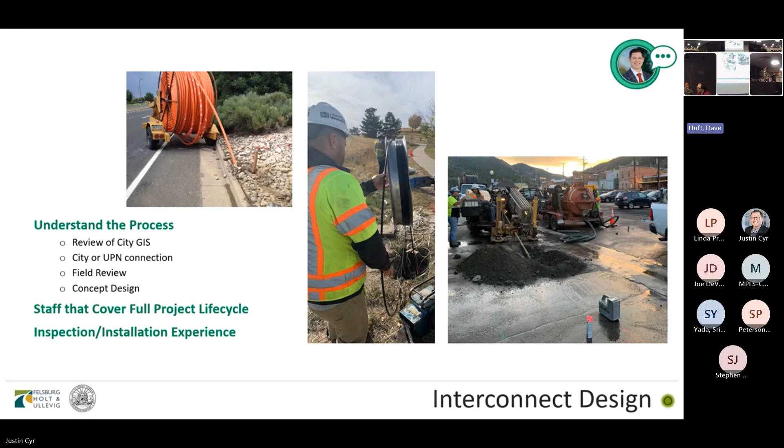And then the fiber optics thing, so this was the interconnect, the next side of the project. This is just showing kind of reviewing the GIS, identifying what's out there today, whether it's UPN, whether it's city, do we need new conduit, what are the obstructions, are there redundant rings or barriers we can connect with the signal system that maybe could help give some resiliency to the city. So these are all things we were looking at earlier on. This was put together through some network splicing.

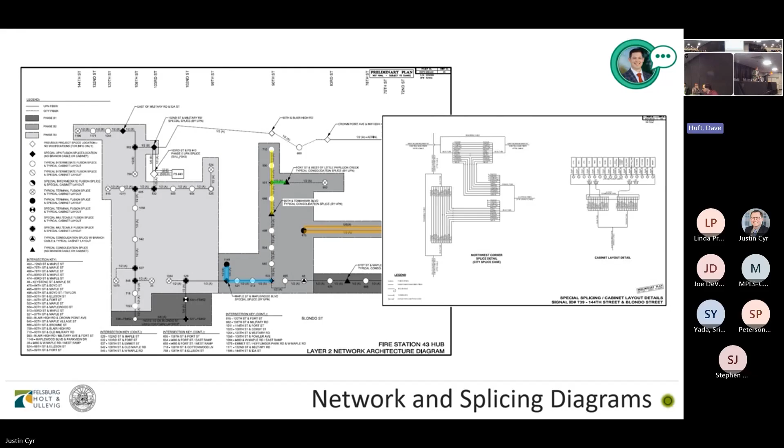So we'd have our network architecture diagram for each of our signal hubs we were tying into, looking at what circuits we needed to activate to bring those signals online. We had a splicing diagram, and we did have some standardization of the splicing. That helped us out a lot, since those were city standard plates, so we didn't have to call every splice and show a splice diagram for every intersection, except for special splices. Then the switch layouts in the cabinets was also something we called out at every location in the plans during that development process.

So basically we did that kind of process for every single system phase to date. There's still a few more left, but it's been pretty amazing to see the transformation of the city signal system from a DOS-based system to a more advanced system, really proactive in future-proofing their system. So Brian will talk about some of the challenges and where the city wants to go with their next set of signals.

All right, so yeah, you can imagine there were a lot of challenges we encountered. We're not going to dwell on all the challenges in great detail today, but we'll hit on a couple. Adam mentioned environmental approvals, so we'll talk more about funding - we ended up using federal aid for this overhaul, which means we're going through the NEPA process, and NDOT just isn't really used to doing this type of project. It's kind of like a square peg in a round hole, where it's not your typical roadway project, but nevertheless, they did look at it that way.

We still had to go through all this analysis, and it wasn't so much of a cost challenge, but more of a schedule challenge. We don't know exactly how long it's going to take for these approvals to get through, and that's probably been the biggest challenge of it all.

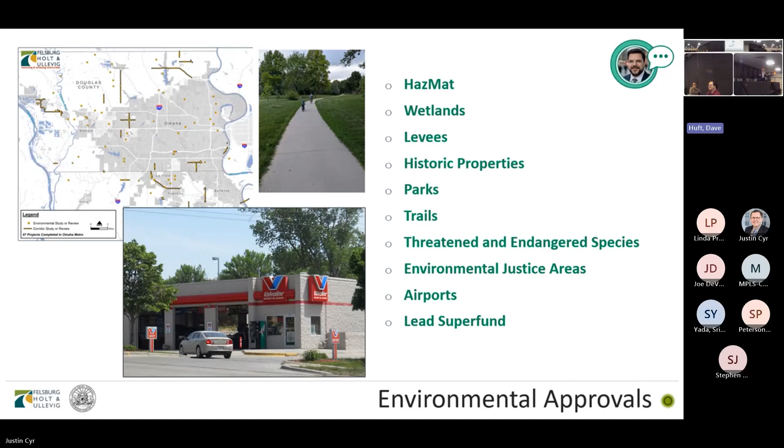But the good news is, after you do this 15, 16, 17 times, you feel like you start to gain some efficiencies, but it seems like the DOT always comes back with a new surprise for us. So we're always continuing to be challenged.

Right of way was another one that Adam mentioned. Again, with the federal aid process, the feds don't really want to spend money on something that's in private property. Unfortunately, over the years, these signals are in some cases extremely old in urban areas, and the poles ended up on private property. We quickly found out on our very first project, which we called Phase A1, that we had several poles and cabinets on private property, and unfortunately, that really slowed us down right off the bat.

So from that point on, we said, okay, we're going to proactively go out and survey every single signal, determine which ones may not be in the public right of way, and obtain a permanent easement. We didn't move the pole, we just obtained a permanent easement, which allowed us to move forward with improvements, even though our signal techs have been and continue to go out there and perform maintenance on those items - just a different funding source, different rules.

One other challenge, I guess I call it a challenge and a success, but one thing I wanted to highlight is, since this whole master plan has started, the city's actually permanently removed, taken out of service, 75 signals from our system. About 45 or 50 of those, we just straight out pulled the signal and replaced it with either a two-way stop or all-way stop control.

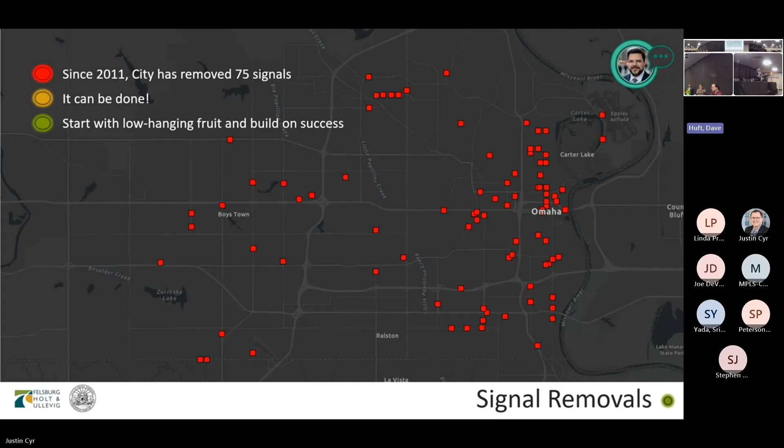There's probably a lot more that I would say technically didn't meet warrants, but for whatever reason it was determined to leave them in. But 75 signals, that's a lot of money that we didn't spend on upgrading unnecessary signals. So I just wanted to highlight that.

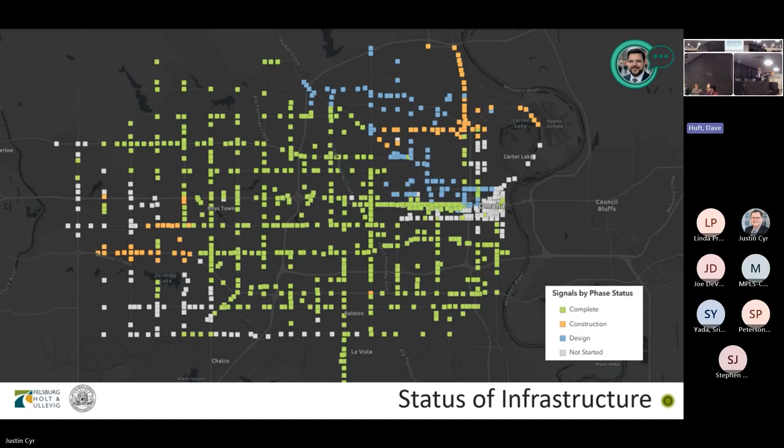So now a little bit about where we're currently at with our system. This is a map of the city. Everything in green there, which is the majority, is now complete. The areas in orange are under construction this year. Areas in blue are under design, and then the lighter gray areas we still haven't gotten to yet, which is the majority of our downtown area and kind of the far southwestern portion of the city.

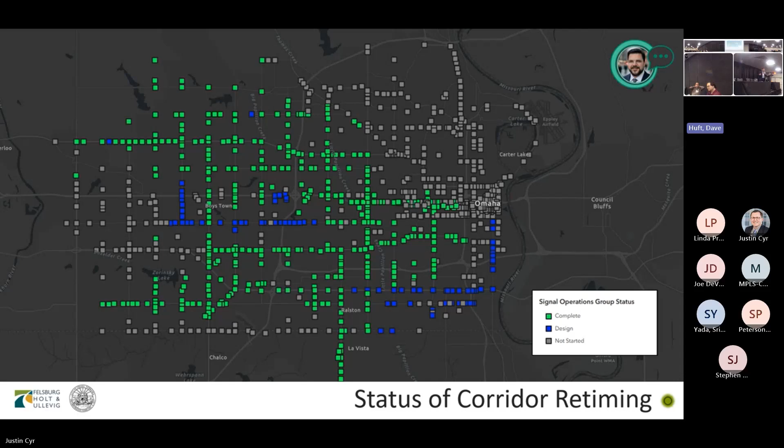We're also retiming all these corridors as we go through. So basically the year after we do the construction, we come back and retime again with the help of our consultant community, really extracting the benefits of the flashing yellow arrow and all these new features that we now have in the controllers that we didn't have before. And really that's been helpful for us in justifying additional funding.

Talking a little bit about schedule and phasing plan. So this schedule now pushes us out to the year, it looks like 2030. And the phasing on the left side is a little different. It's not 1 through 10, it's now A1 through H2. But it kind of breaks it down by phase.

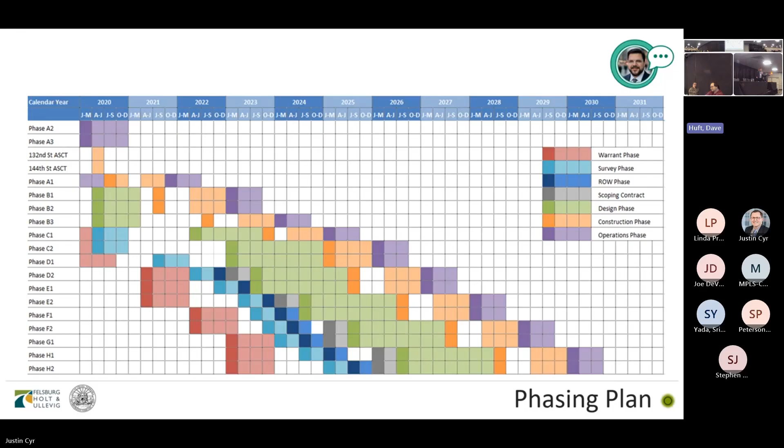So for our last two phases, H1, H2, we started those back in 2023 doing the warrant analysis. It will take 6 or 7 years, I don't want to say primarily because of the permit process, but to basically get to the end point where we're actually retiming those corridors. So in order to deliver 22 phases in a 10 or 12 year period, in any given year we're working on 10 or 12 or 14 different projects, each of which are about 50 signals apiece. So there's a lot going on.

So I mentioned early on, $35 million was the projected cost. We have a pretty good idea, even though we're not quite done, how much it's going to cost. So I'll summarize that here if anybody's interested. Construction estimate was $35 million back in 2012. I'll break this down by phase. So warrants, we spent $0 million on that because we pretty much did all that in-house. That was a nice cost savings, although it cost me a lot of gray hairs.

Survey and right of way, again not something we really anticipated doing at the master plan level, we spent about $2 million on that. Design services, so hiring Adam and his team and all the other consultants has been about $9.4 million. Again, the thing about the master plan is we didn't necessarily identify what some of these other costs were going to be. So you can quickly see that the cost, we're already at $11.5 million, and we're not even to construction yet.

Another $1.7 million for NEPA services. Again, the cost there isn't terrible, but more so on the time and schedule impacts. Utilities, $1.6 million. This primarily are the costs that went to Unite Private Networks for us to splice into their system, a one-time upfront fee. We don't pay any maintenance on that moving forward. So despite this cost being there, the alternative would have been to build 50 additional miles of fiber optic cable at a much higher price.

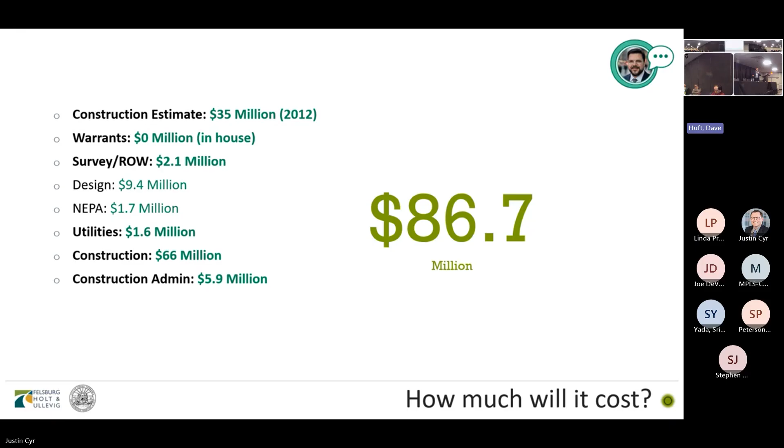Construction administration services, as we hire contractors to do this work, $6 million for that. And then when we sought some additional funding sources, CMAQ funds being one of those, we also started to now retime all these corridors, so we spent about $4.5 million on that. So the grand total, I'm thinking where we're going to end up is about $91 million. So that's a lot of money. And so you thought $35 million was a lot of money.

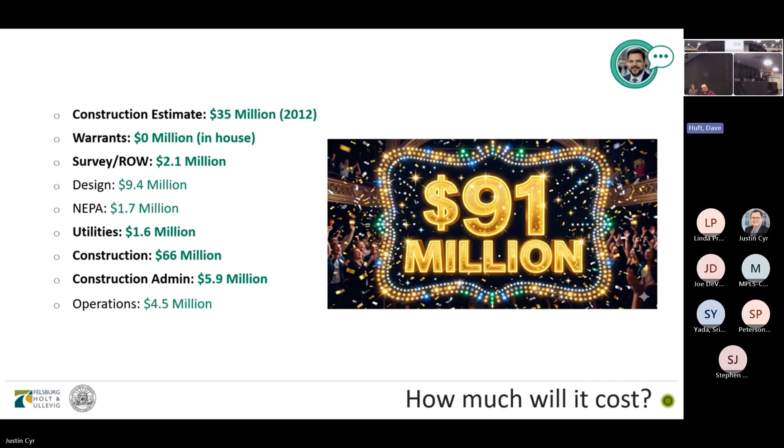It's like, where in the heck are we going to find $91 million when we budget $1 million a year? Well, a couple different sources.

Kidding, that was also just a little bit of a dream of mine. So where did we get the funds? Well, not to be too anticlimactic, but it was through a lot of different federal aid sources.

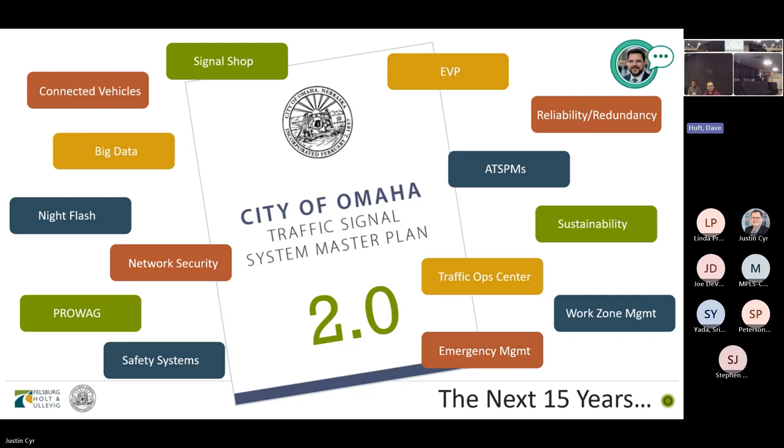So, looking ahead and figuring out what's the next priority, I don't know how many tens of millions of dollars we'll need here, but I'm excited, after doing somewhat repetitive projects for the last 10 or so years, to take a fresh look. I'm very grateful for the consultant community that's helped us out over the years. It's been a lot of fun working with everybody—challenging, but at the same time very rewarding as well.

So that's it for us, for our presentation today. Appreciate your time and attention, and I think we're happy to take any questions.